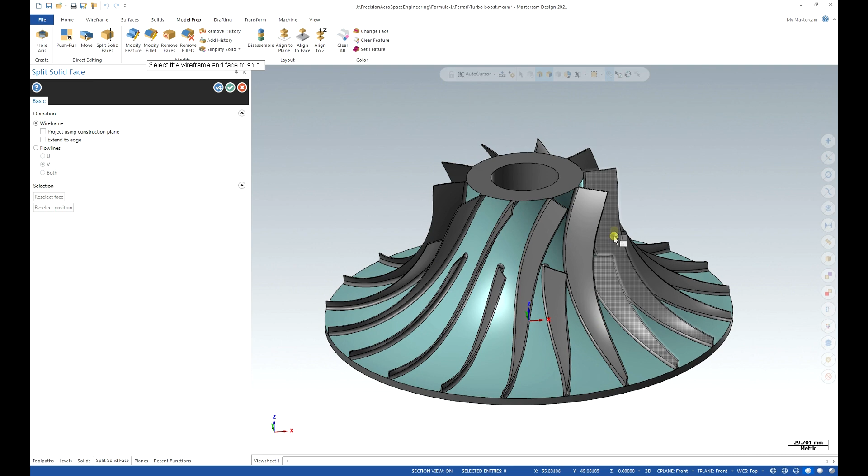Using wireframe or flow lines. I want to use wireframe. First you need to tell Mastercam what face you want to split, and at the moment I've got one face that is the floor of this impeller, so I'm going to split it to have a separate section.

I want to use this edge of the fillet. Using your left mouse button, click on the lines that you want to use to cut your selected face. After selecting the line, it changes color to purple.

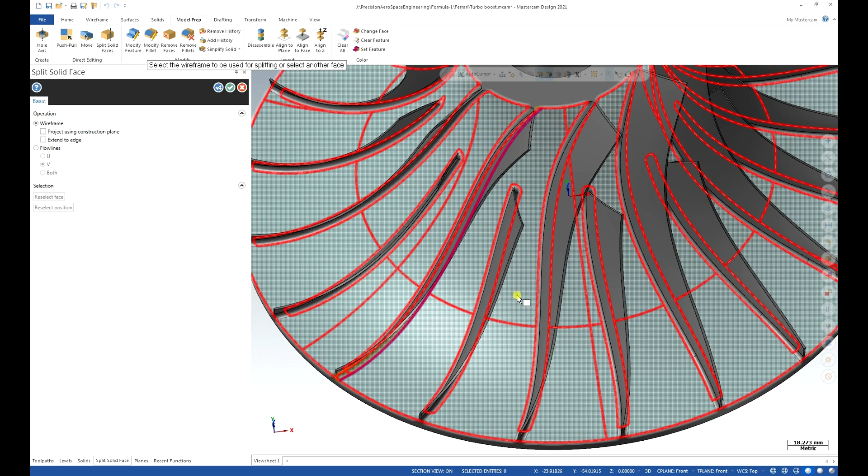I cut it on one side, but to separate the face and have a separate face, I need to select the other side as well. When you select those lines or a closed chain, Mastercam will show you that you completed your cutting, because when you hover the mouse without clicking, just hover it above your face and it will highlight in a different color.

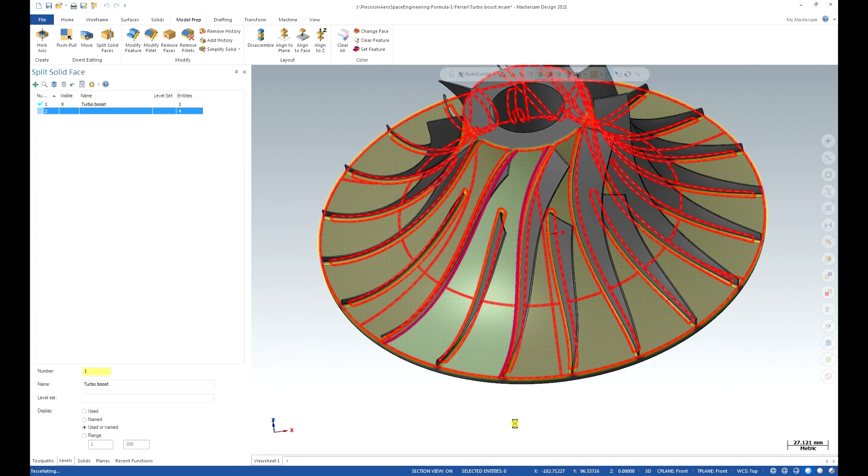Press OK to finish, and your new face will have different colors, so you can see clearly what has been created for you.

Let's check the different options we have to split the face. Select Split Solid Faces again, and this time we are going to use flow lines. You have horizontal and vertical lines that you can use, or both at the same time. I'm going to use the V lines.

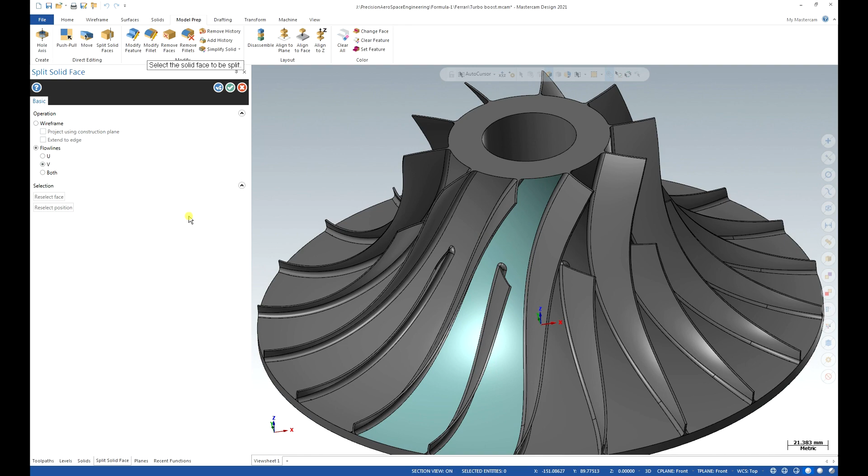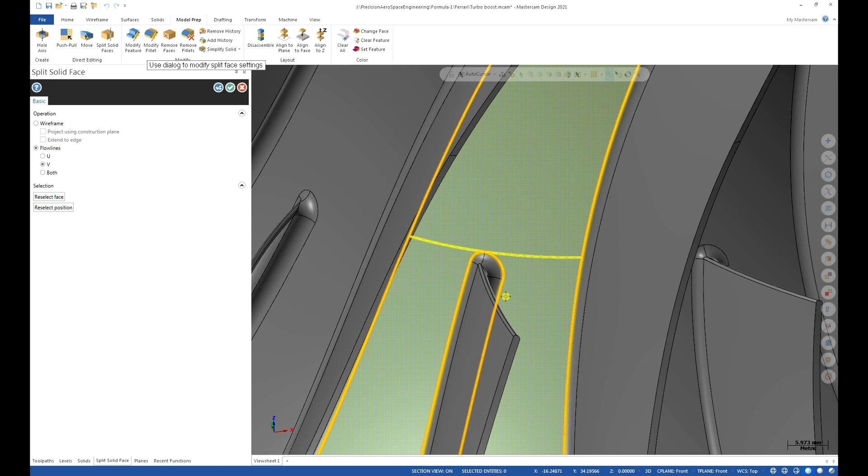First you need to show what face you want to split. Zoom in to the area roughly where I want to put my line, and I want to be, for example, on the edge here. When I'm in the right position, I see the yellow line crossing the face, and if I'm happy with the result, I click the left mouse button to accept, then the green OK button to close the window. And this is your new face here.

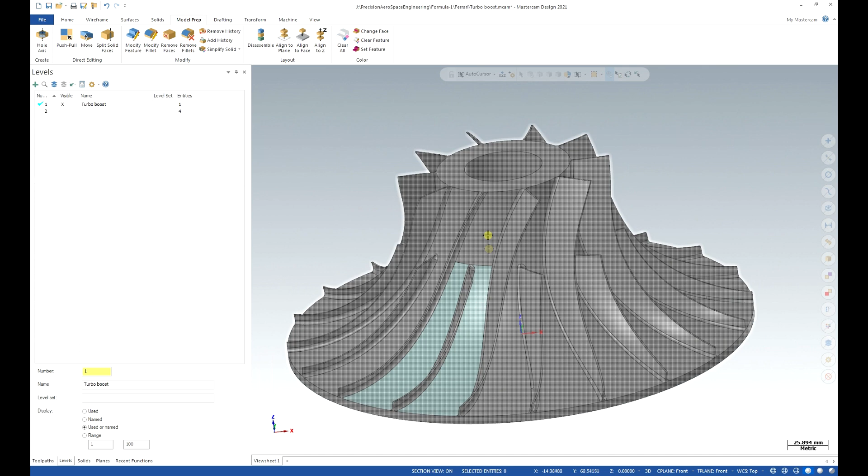There's one very important thing I want to highlight. If after splitting your face any of your machining operations or toolpaths go dirty, that means this face was used inside those operations. So you have to add the new face you created into the operations that used the original face. Next example, I created a spline.

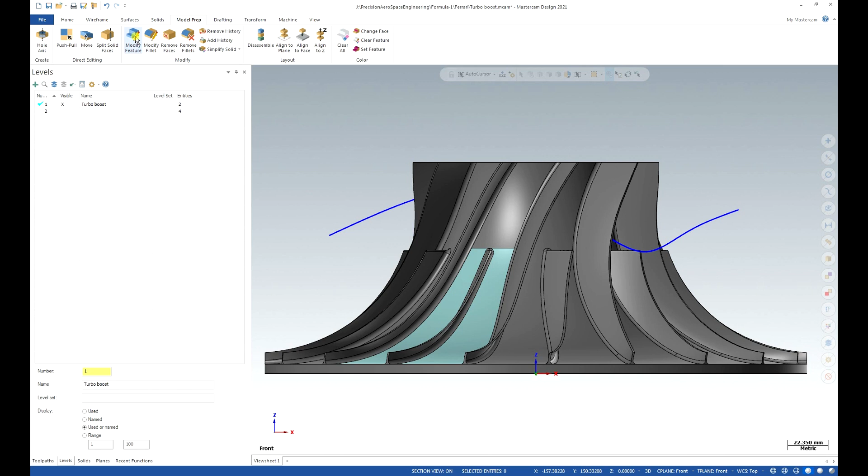You can use a line, a circle, any geometry you want, and I'm going to project this line. Let's have a look. Let's go back to Model Prep, Split Solid Faces. I want to split this face here, and I want to use wireframe.

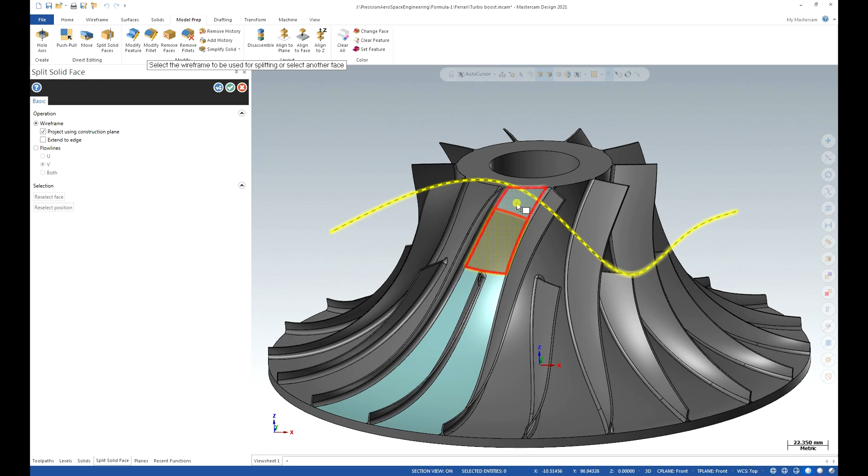Select the line and tick project using construction plane. Mastercam uses the construction plane to project the line or geometry onto the solid face, and then this line is used to split the face. It uses the construction plane that we have active at the moment.

Now click the green button to accept the settings, and we have two faces, and again the new face changes color.

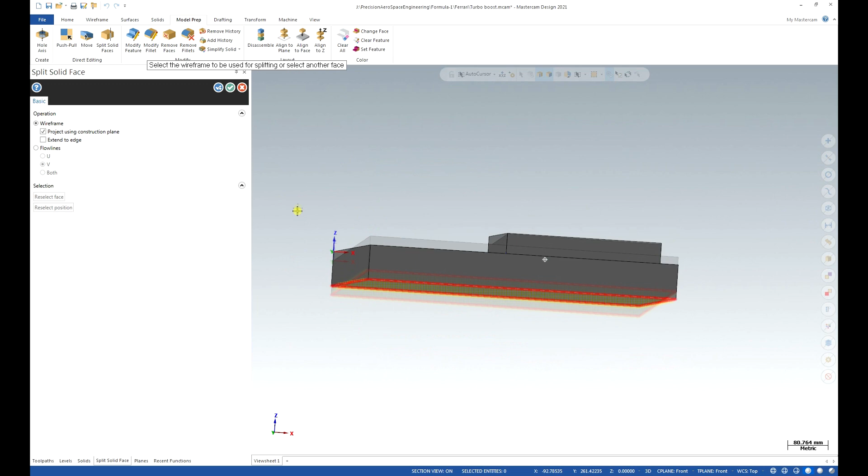Inside this operation we have another option we can use. For example, let's say I want to split this face and project this edge onto the bottom face. What I can do is extend this line through the surface.

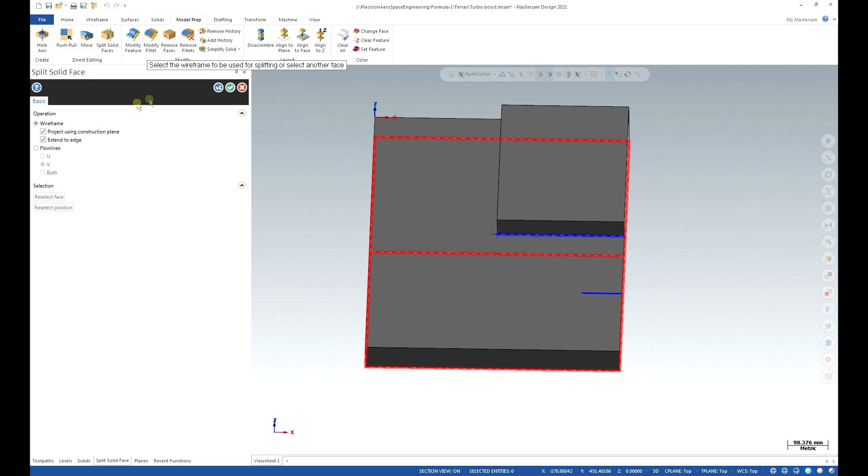Again, you can highlight the result, the face that is split. It's useful when you have more complex geometry.

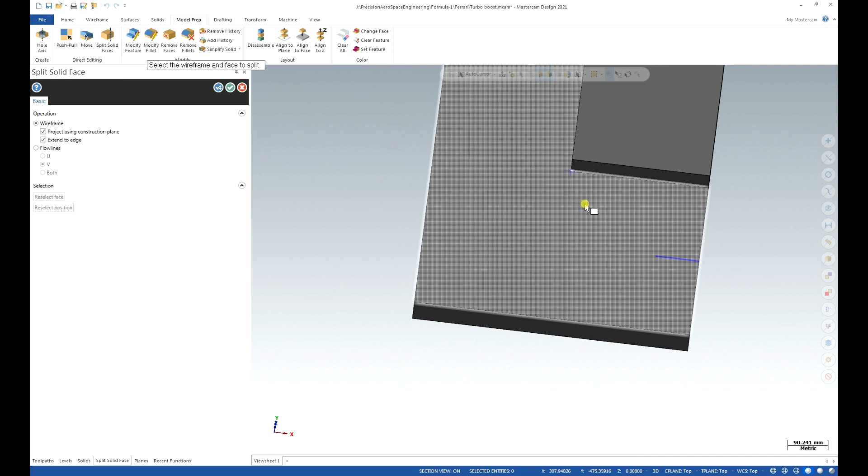Another thing we can use is just wireframe. Basically, show the face you want to split, select this line, and when you have extend, it will extend it. Accept, and you have a new face.